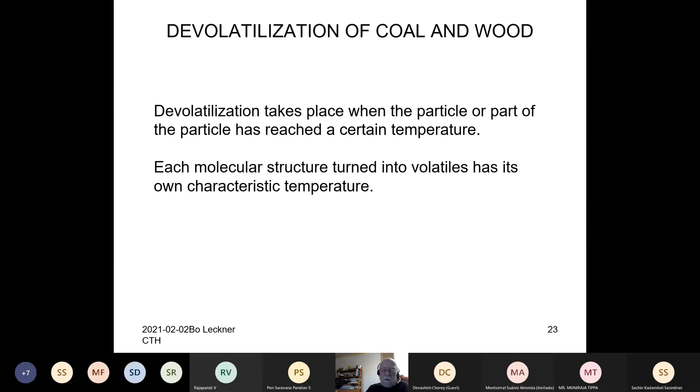But first, I will say a few words about volatilization, which takes place when the particle or part of the particle has reached a certain temperature. Then the molecular structure is turned into molecules depending on its own properties, its own characteristic temperature. Drying has the same properties - it takes place when the temperature has reached the evaporation temperature. This could take place in the particle simultaneously if it is a small particle with small Biot number, or gradually if it is a large particle with large Biot number.

But there is another complication I would like to illustrate here. We have two cases: the coal case and the wood case. In the coal case, when the particle is heated, the volatiles and moisture are released rather much the same way around the particle. It is called isotropic, because of the structure of the particle - it is not very changeable in different directions.

But there is a flow out, and this was the flow I called previously the Stefan flow, that could impede the transfer of heat and mass from outside to the surface of the particle. However, the effect is not so big, so probably it can be neglected in many cases - it exists, but is rather small in most cases.

In the biomass particle, particularly in wood, the fibers are directed in a particular way, and the gases leave through the fibers. So they tend to leave in a particular direction, whereas the heat and mass transfer may take place in a perpendicular direction. So it is much more complicated than coal in that respect.

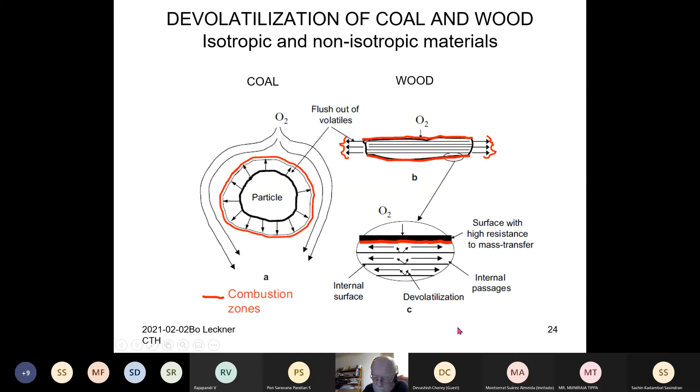In general, you could say that fuel plus heat is equal to volatiles plus char. Volatiles are the gaseous product that leaves when the fuel is heated, and char is what remains. The energy of the reaction, or heat of reaction, is rather not so big, so we could say it is negligible in most cases - neutral, as it says here.

But you can develop this even further. You could say that the volatiles consist of gases, which are non-condensable gases, and tar, which are gases that could condense at a certain temperature, usually in the surroundings, not in the furnace or reactor itself, because there the temperature is high enough. So this is only important in gasification, for instance, and I don't think it is important in boilers. They react in different ways, but they will react more or less before they exit.

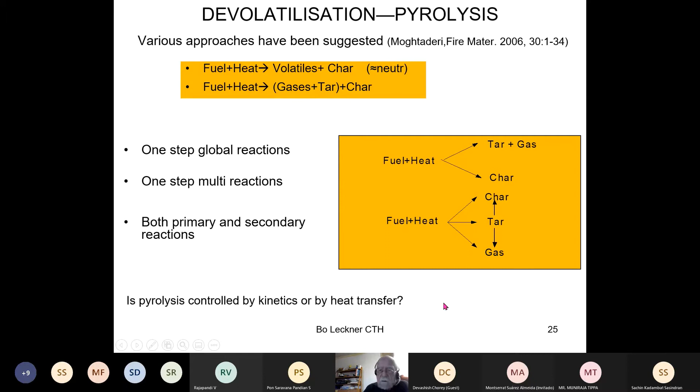There are different ways of looking at this. You can make a model of a single reaction pyrolysis like this, that the volumetric reaction rate is equal to the density change with time. Density is, of course, mass divided by volume. This belongs to the reaction rates I defined yesterday, so it is a reaction rate here, but expressed in terms of density.

There is a change of density that can be expressed as the current density minus the final density, the density when all the volatiles have left - that is probably the char density. So here is the current density of the particle, and this is the final density when volatilization is finished. Here is just a reaction rate coefficient, just like I mentioned before.

This reaction rate coefficient can be expressed in terms of an Arrhenius equation, just like in coal combustion. We have a pre-exponential factor and some kind of activation energy to be determined empirically by experiments at a certain temperature. This is, as I said yesterday, the gas constant, which is included there for traditional reasons.

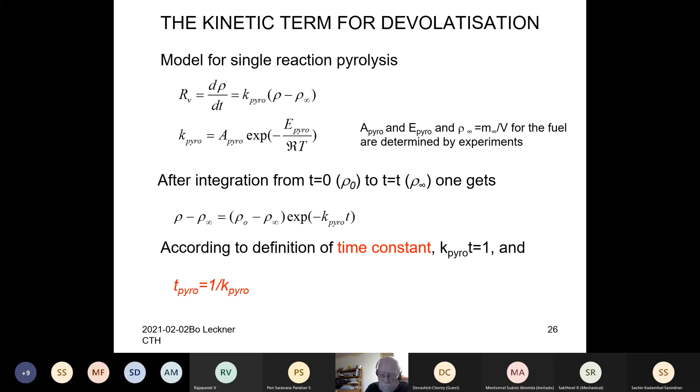Let's continue. Again, this equation that we always like to use, but in a very simplified way - this is the transport equation. The transient term for the temperature here, the dimensionless temperature, and this is the diffusional part. I have not included the convective part. So this can be solved.

In fact, I don't know how to solve it, but I can look it up in a textbook which gives the solution of simple differential equations, partial differential equations. And I can get that depending on the boundary conditions.

For Bi large, I get a solution like this, that the temperature is a function of Bi and an exponential term, which is a function of the Fourier number. If Bi is small, I get this solution, simpler, it is just the Bi times the Fourier number here.

I don't know exactly how to treat this, but I do it in a very simplified way because I just want to get some idea, not the exact solution. So I say that this term is unity, and I neglect this, it's maybe unity more or less also. So I'm only interested in the Fourier number and the Bi times Fourier number, which I have put equal to 1 because it is the time constant that I'm looking for.

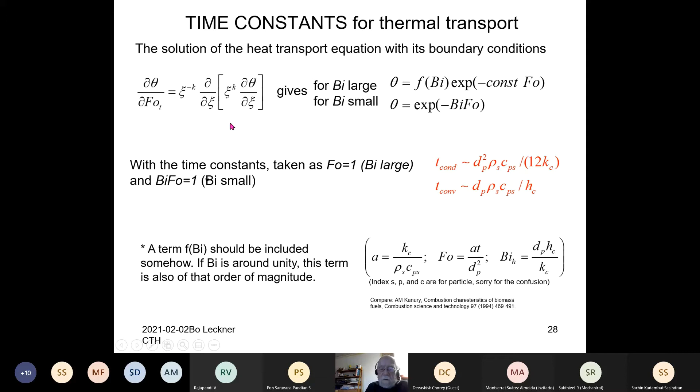We will come to the next picture. Next figure will show the results. This is the volatilization time expressed in the time constant, and then I have the fuel particle size here in millimeters, but in a logarithmic scale.

So we have 1 here, 10, and so on. The diagram looks rather complicated, but if you focus on the red lines, this red line is for the large particle. It's proportional to diameter squared. You can see the inclination of the curve. But for smaller particles, it is proportional to the diameter itself, linearly proportional.

And then for very small particles, there is no proportionality, but here I have calculated the time constant for the kinetic reaction, and it is around here. So for very small particles, much less than 1 millimeter, we have kinetics control. For little larger particles, around 1 millimeter here, we have convection control, I can say. And this is then the diffusion control.

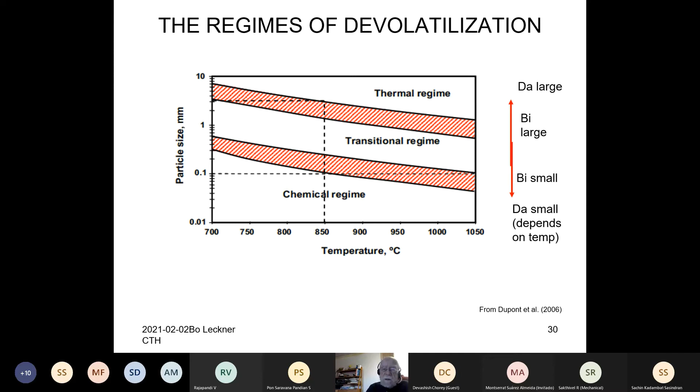In wood, we have only 3 components. Wood is composed of these very complex molecules, but only 3 types. Whereas coal is composed of a large number of molecules, more or less complex, so coal cannot be represented in such a simple way. Instead, one uses a statistical treatment of the various molecules of coal to get a statistical curve of the rate of volatilization as a function of temperature.

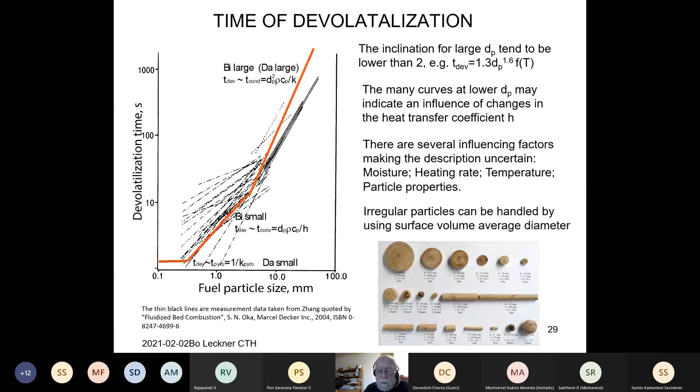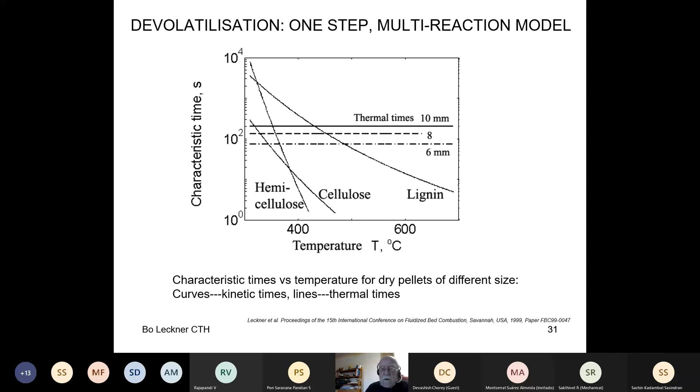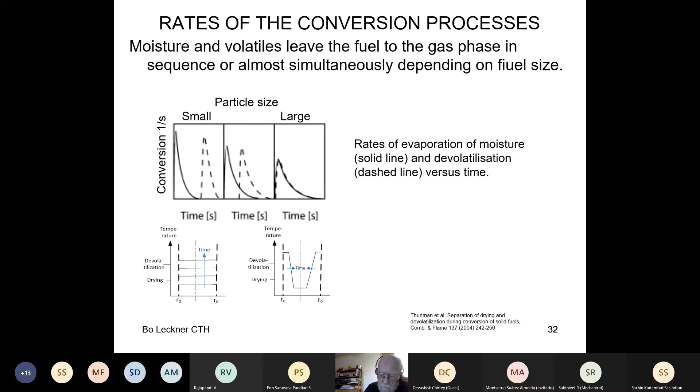Whereas for larger particles, there is a wave of temperature moving inside the particle. We have quite a different temperature profile with large gradients of temperature inside the particle, and the difference between the volatilization temperature and the drying temperature is very small. That is why they almost coincide. This is an interesting phenomenon related to the Bi number of the particle, or the size of the particle, you could say.

I can summarize by saying we have been discussing two sets of dimensionless numbers, each valid for heat transport or mass transport, or the release of pyrolysis because of heating and the transportation of mass. So for large Bi numbers, internal heat transport controls. For small Bi numbers, external heat transfer controls. That is for the Bi numbers.

And then the Damköhler number can be expressed as a ratio of conduction or convection time and reaction time. So when the transport time is large, transport conditions control - Damköhler is large. When the Damköhler is small, the reaction time is larger, so the pyrolysis rate controls. This is very classical in the devolatilization field, and particularly liked by many researchers in biomass, because there was much research in biomass related to pyrolysis, since the volatile content in biomass is so important.

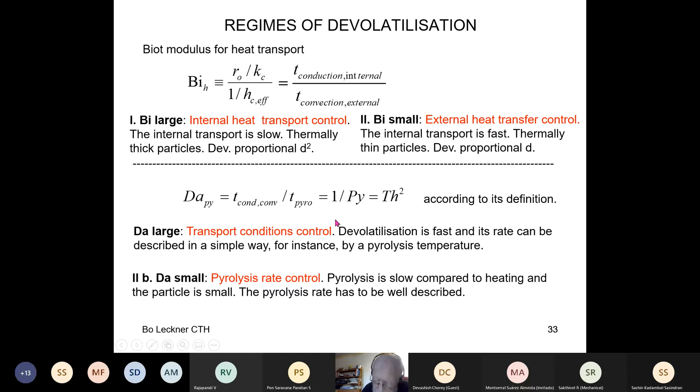Okay, so I have more to say about pyrolysis, but I am lacking time, so I would like to go directly into char conversion—the remaining material after volatilization.

In biomass, maybe 20% of the particle's energy remains as char. In coal, it depends on the rank: anthracite has very little volatiles, while lignite has maybe 50% or a little more volatiles. So coal is more variable, while biomass and related waste products have more volatiles. But here we have the char.

An important question is whether char conversion is controlled by kinetics or by internal or external transport, and also how to describe the reaction rate—whether to use a power law or multi-step reactions. This is what I'm going to discuss a little.

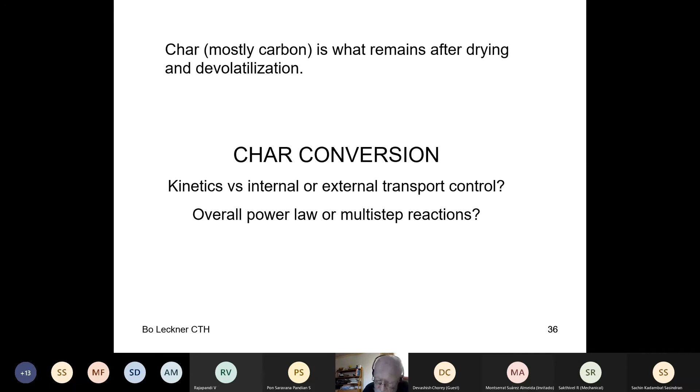When we start to oxidize char, which is mostly carbon, the carbon reacts with oxygen to form carbon monoxide or carbon dioxide. Both reactions may occur simultaneously with the same amount of oxygen. So this is a problem—we don't know exactly what happens on the char surface, whether we get carbon dioxide or carbon monoxide. What we know is that under combustion conditions, sooner or later the carbon monoxide will be oxidized to carbon dioxide, but this happens outside of the particle. So we are now at the surface of the particle or inside it. Both are exothermic reactions.

It can be expressed in many ways, but sometimes a simple combined reaction is used, with F as the molar ratio of carbon to oxygen—this is a parameter in the equation. If F is 1, we get zero CO2, and all the carbon is converted to CO. If F is 2, we get only CO2 and no CO. So this is a kind of parameter you can use to express the reaction from one extreme to the other.

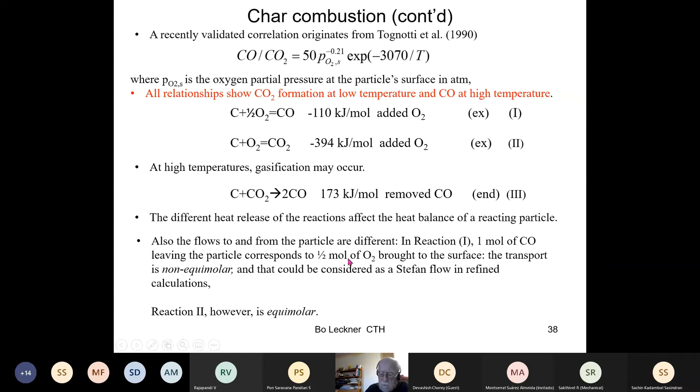There are some other reactions that I would like to mention at the same time. Even in a combustor, you may have water vapor, of course, and that may gasify the char. Water vapor has a faster rate of gasification than CO2, but still the concentration is rather low under combustion conditions, and the temperature is not extremely high. But in any case, you can say that the temperature has to have a certain level in order for the thermodynamics to go to the...

For the thermodynamics to... Do you hear me? Can you hear me? Sachin, can you hear me? Yes, so yes, it's okay. Yes sir, so I wanted to say that yes.

This is the thermodynamics, this is not the rate of reactions. This is the end situation. If the rate is very fast, you can come to such a situation where everything is reacted, but then the temperature has to be sufficient. Also in the CO2 gasification reaction, temperature has to be sufficient for thermodynamic reasons, but the rate is slow, so it will not reach very far.

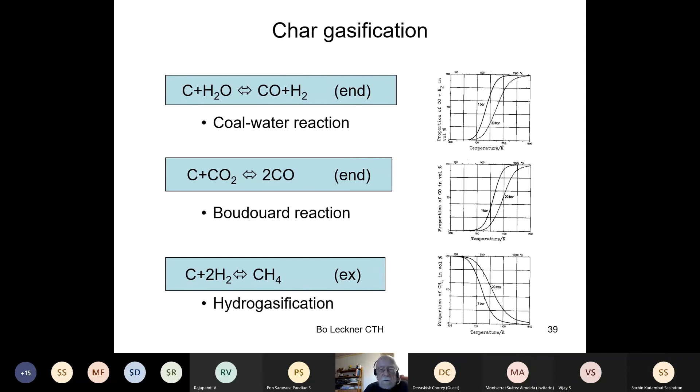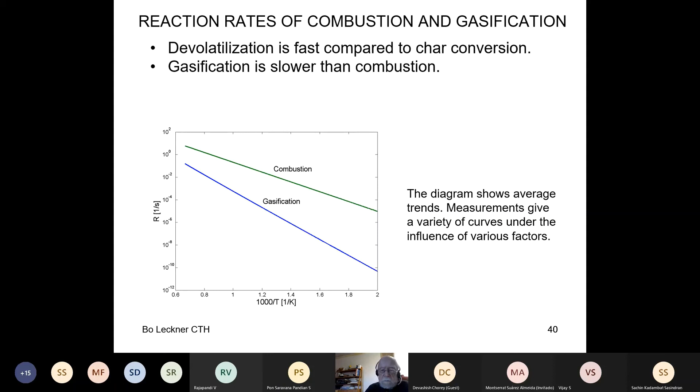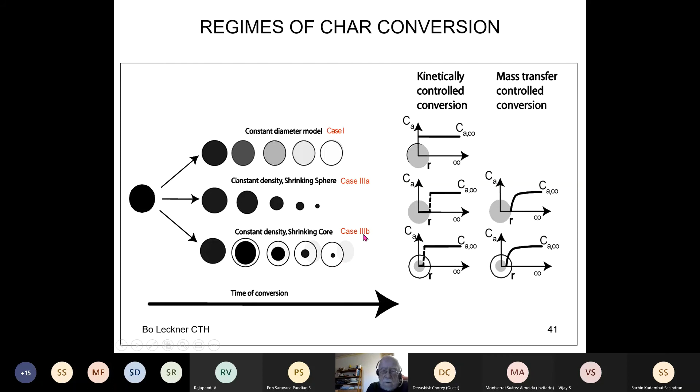So these are very, very important. Let me illustrate them again. Suppose we have a particle of a certain size - this is the surface of the particle, this is the gas concentration. In case 1, we have diffusion everywhere, reaction rate is slow, and there is no problem. It will maintain its concentration while the particle is reacted.

But in case 3, as I said, there may be some fall in the boundary layer because of diffusion resistance, but here at the surface it is reacted, so the concentration is always 0. Case 2 is an intermediate case.

There are two variants. If we suppose there is no resistance in the boundary layer, case 2 gas comes to the surface of the particle, but it is slow enough to penetrate inside the particle, so there is a concentration gradient inside the particle, like this. It could be slower or faster, depending on the concentration gradient or on the diffusion rate inside the particle. Here we have some diffusion outside the particle as well as inside the particle - so this is another variant of case 2.

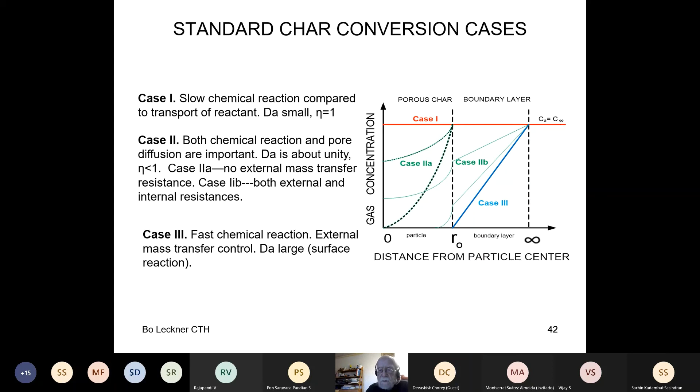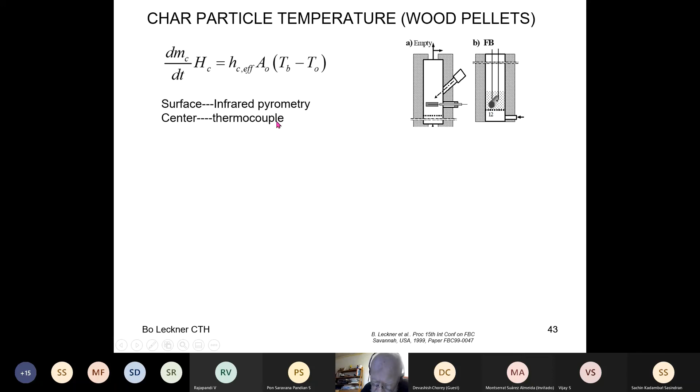So we will see what happens in different cases. I start like this: in this case, we have 800 degrees always in the reactor. We have 21% oxygen in this empty reactor, and we have 21% oxygen also in the fluidized bed reactor. And then we measure what happens during time, particularly the temperature, as an indication of the reactions.